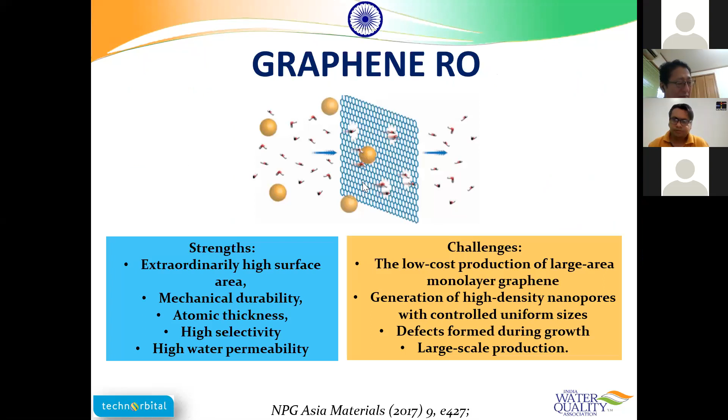So, as the topic is very apparent on the slide, I'm going to talk about the future treatment as far as water purification or drinking water or any water treatment is concerned. So, thank you again, Water Quality India Association, for inviting me. So, let me see how it works.

So the presentation layout is, I'll talk about a little bit of history. Those who have attended my previous talk know I really love to discuss history, because history is like the roots to your present and future development. Then what are the present issues, and then the future on the water treatment front. The future I have split into two sections: we can understand water treatment broadly through desalination and non-desalination.

So begin with the future. Sorry, the history of filtration. I just want to get rid of this top thing. I don't know how to make it disappear, so anyway we can live with it.

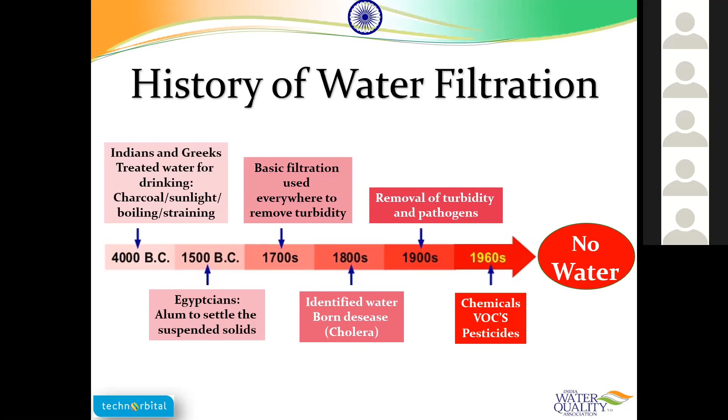We are putting around 80% of the wastewater back into the oceans or rivers without treating it. So that is the price we are paying for our so-called industrial development.

Until now we were talking about treating the fresh water which is available to us, maybe a river, lake, whatever natural source. Now the focus is suddenly how can we recycle the water? And since we have messed up too much with the natural sources of water, now we are focusing on sea water. That water is of course there, like 97% of the earth is sea.

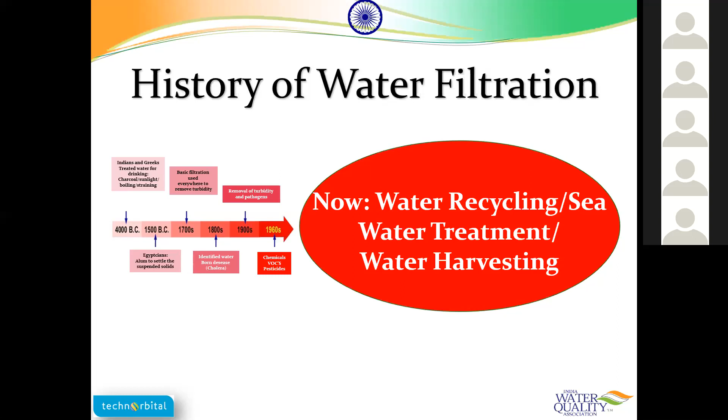So, okay, now coming to the present or future, as I said, I have split this presentation in two parts, desalination and non-desalination. It's not that only desalination can justify the future, but coincidentally, it covers everything. It will cover all your other technologies, whatever is happening now and what will happen in the future, and desalination will end up needing other technologies like nanofiltration, ultrafiltration, microfiltration.

If you want to understand desalination, primarily there are four different ways you can do it. The first is thermal energy, which, to understand it in a simpler way, is mostly distillation or evaporation techniques. Membrane distillation also lies under thermal energy, because though it is a membrane, it needs the feed to be heated to some 75 to 80 degrees.

Mechanical energy covers all the RO membranes, NF membranes, or any other membrane. Electrical energy is electrodialysis or capacitive deionization, and then chemical energy is the ion exchange resin.

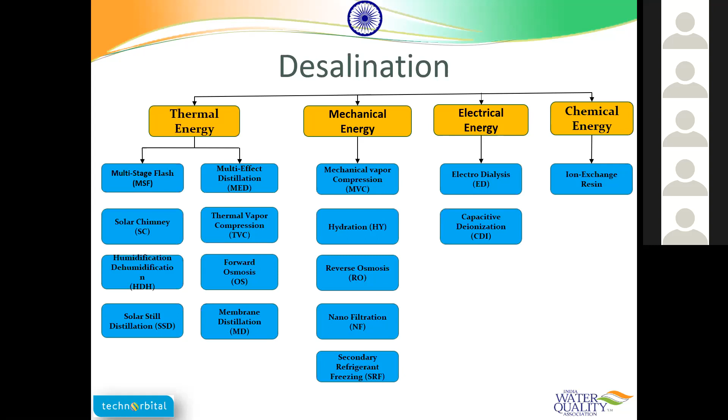So let's try to understand what the future of water treatment is going to be as far as membranes are concerned. Since I'm assuming most of you attended my previous talks, I'm jumping to the topic without explaining what reverse osmosis is. Of course, all the members here know what reverse osmosis is.

At present, there are categorically four types of RO membranes: tap water RO, brackish water, sea water, and ultra high pressure RO. In the brackets you can read the TDS limit in ppm it can treat, which varies from 2000 ppm to 50,000 ppm. The water recovery in these four types of membranes varies from 70 to 50%. That's the max. On average, in terms of practical achievability, it is around 50%.

Okay. Sunil, this recovery is 70 to 80? It is 70 to 50. It's showing this error, no? Yeah, it is 70 to 50. Okay. Does it show 80 there? No, it's not there. Because usually when we write a range, we write from the left side, 50 to 70. So you wrote it backwards. Yeah, it's some error or typo. You just consider 50. Okay. Please go ahead.

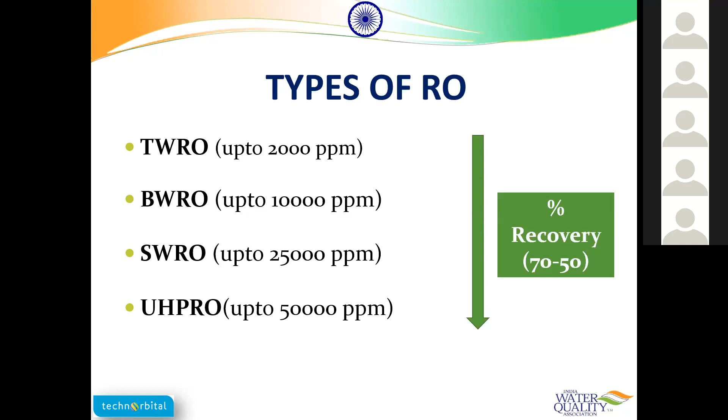So, in order to understand the future of RO, we need to understand the economics of RO. I'm talking about a typical seawater RO plant here. The capex accounts for up to 53%, the opex is around 47%, and of this 47% opex, energy consumption is up to 69%. That's the present situation.

So what are the triggers for the innovations as far as RO or replacement of RO is concerned? Right now the major issues are fouling, whether it is biofouling or colloidal fouling. The energy consumption per meter cube is relatively high. The fluxes are very low; we are talking about 3 to 15 liters per meter square per hour.

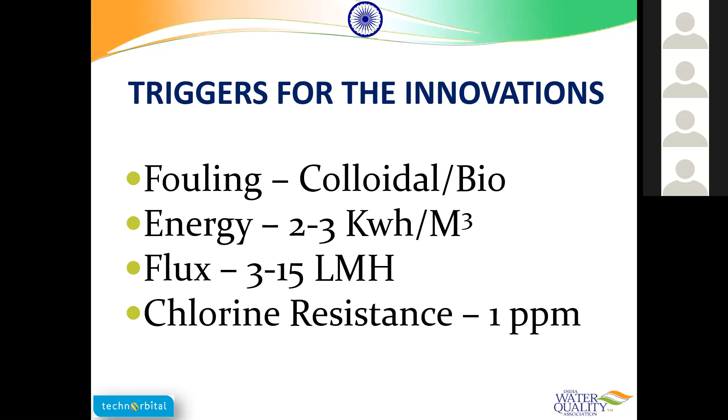Chlorine resistance is very low, up to 1 ppm, and you need chlorine resistance in order to clean your membranes, backwash, forward wash or chemically enhanced backwash. So these are the triggers for the RO membrane to be taken to the next level, or for future developments in RO.

So the first thing I'm going to talk about is RO modified by using nano embedded materials. The idea in today's talk is to just touch upon all the developments or potential technologies which people are working on, or which you can see in the market in the very near future, like maybe 6 months or 1 year, or in the next 3 or 4 years.

So I'll just briefly touch upon the technical aspects of it. If you want to discuss the technicalities in detail, we can have that discussion one on one. So RO-NEM is a membrane, an RO membrane, as you can see in the picture on the right hand side. The top layer is coated with

some... So there is some bandwidth, maybe. Sunil, not able to hear properly. Yeah, now it's okay. Go ahead. Just a minute. Seems like some network issues at mine. Yeah, please go ahead.

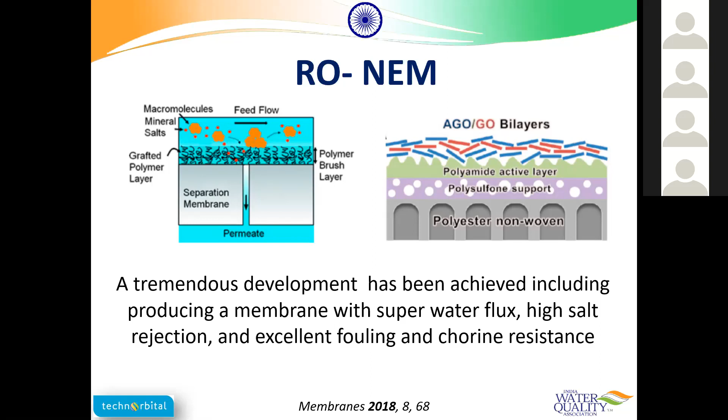We can hear. So RO-NEM is like coating the RO top surface with some nano embedded materials like oxygenated silver or oxygenated graphene. What it does is increase the water flux and salt rejection, improve the fouling behavior of the membrane, and also improve the chlorine resistance. People have been working on it for a long time, and I think it should be in the market in a couple of years.

Now the next level of development happening on RO is forward osmosis. There are a couple of companies already offering this, and in India also there are a couple of groups extensively working on this, including some CSIR labs. In order to understand forward osmosis, you need to understand what osmosis is.

In reverse osmosis, we reverse this by applying pressure on the opposite side. In forward osmosis, we use this concept: how can I modify the right hand side or permeate side of the membrane so that it automatically draws the water from the feed side. So that is forward osmosis. So how does it look? It looks something like this.

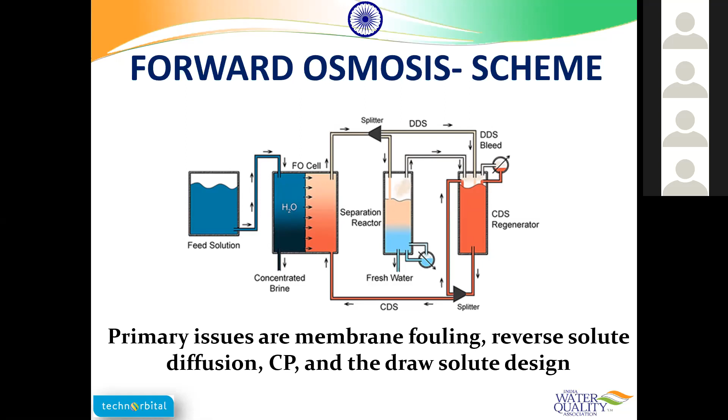There are many issues like membrane fouling, reverse solute diffusion, concentration polarization and all that, but it's a relatively low pressure operation and it holds huge potential. People are aggressively working on it, and a couple of companies are already offering this solution. Now the third thing is osmotically assisted RO.

Osmotically assisted RO is a combination of RO and forward osmosis. The picture here is a little busy or messy, but what we do is arrange different RO membranes or RO skids in such a manner that it works as a normal conventional RO.

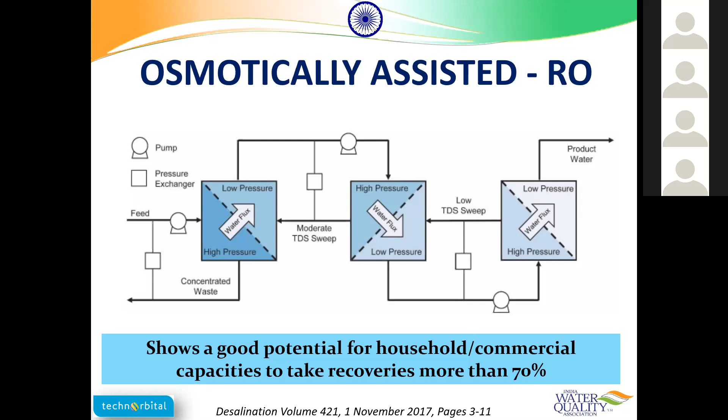Along with that, we purposely maintain some TDS levels in the permeate flow so that we exploit the osmotic pressure also. You don't need to understand this picture, it's very complicated, but it is a combination of RO and forward osmosis. And this holds the potential of taking recoveries up to or even more than 70%.

Now the fourth thing which people are aggressively working on, and there are a couple of companies who are already there in the market offering commercial solutions, and this is also very close to me because I'm personally working on this. So it's membrane distillation. These are membranes which are used for distillation or water purification, removing the salts or minerals from the water. These are not like RO membranes. These are maybe similar to ultrafiltration or microfiltration membranes. So these membranes have pores which are bigger in size. We are talking about maybe 40-50 nanometers, or maybe 0.04 micron in size.

So what you can see, I'm just trying to find a laser pointer. Yeah, okay, I got it.

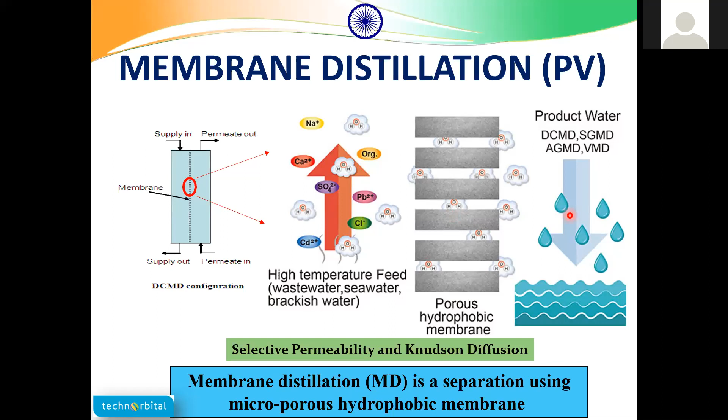And this membrane is a hydrophobic membrane, so it doesn't like water at all. It rejects water, but it only allows the water vapor molecules to pass through these porosities or channels. This is known as Knudsen diffusion. On the other side, we either have a vacuum or fresh air at room temperature or very low temperature. So it collects all those vapor molecules and they go for condensation. So it is a purely thermodynamic application. You can see this in the market maybe 6 months from now.

So what is good about MD membranes is that, in contrast to RO, you're talking about hardly 1 bar pressure in the feed. And the other thing is your recoveries can go up to 90%. As we know the limitation in reverse osmosis membranes, even if you take ultra high pressure RO, which can treat say up to 50,000 ppm TDS, the maximum it can concentrate the feed is up to say 10%. In membrane distillation you can go up to 35 to 40%, up to the point where the precipitation of the salt starts. So you can go up to even that level of salt concentration.

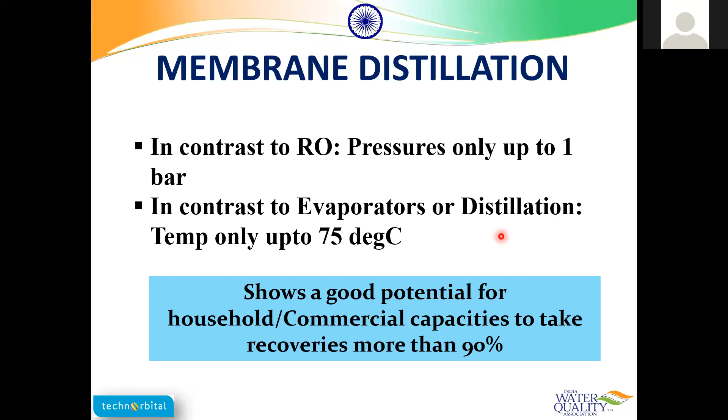So now the fifth thing is graphene RO. There are a couple of international groups who are aggressively working on this. There is one US group who is claiming that they have these membranes already. A graphene membrane is basically a monolayer of carbon atoms, and these hexagonal structures you see are a structural sieve or atomic sieve, which will separate monovalent or divalent ions or other impurities. Of course, the strength of graphene RO is the extraordinary high surface area, mechanical durability, atomic thickness, high selectivity, and all that.

But still there are issues as far as large scale production is concerned. Low cost production is a very big challenge right now. But the way people are pursuing this, it seems like in a couple of years' time we should have this as a commercial solution, and maybe to begin with, it can focus on high value added products where people can afford the high cost.

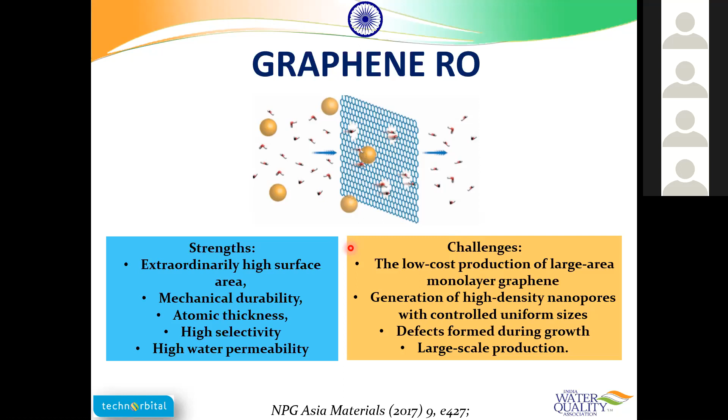So the last part I'm going to discuss on membranes is biomimetic membranes. Now what we need to understand, nature has given solutions to this problem, whether in nature or in our body itself. When I say biomimic, it means can we mimic the biology of nature or the human body, and come up with membranes which represent the operations the body is taking care of, maybe blood purification, or whatever we eat and drink.

But our kidney is under use for, even if we take an average life of 70 years, it is still under use without any chemical wash, CIP, backwashing and all. So similarly, the cell membranes are filtering the liquids, and they only allow the necessary amount or necessary quality of water to pass into the cell, and they reject all the unwanted impurities.

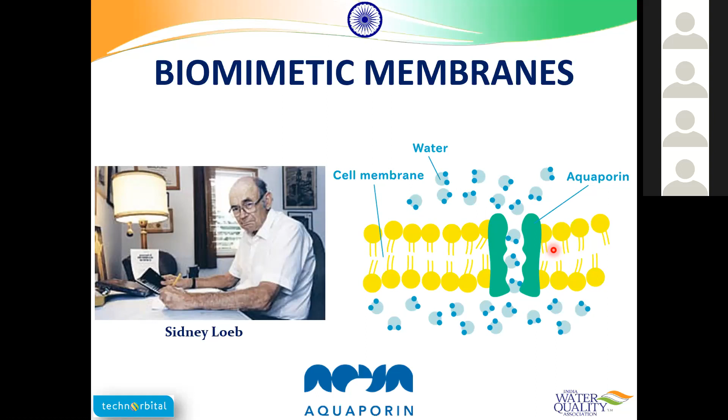And of course there are people working on making desalination more feasible. So a combination of all these membrane based technologies I mentioned, you can mix all that and try to come up with a very feasible solution. People have started already using energy recovery devices. So ERD is already in the market since many years. So yeah, that was based on the

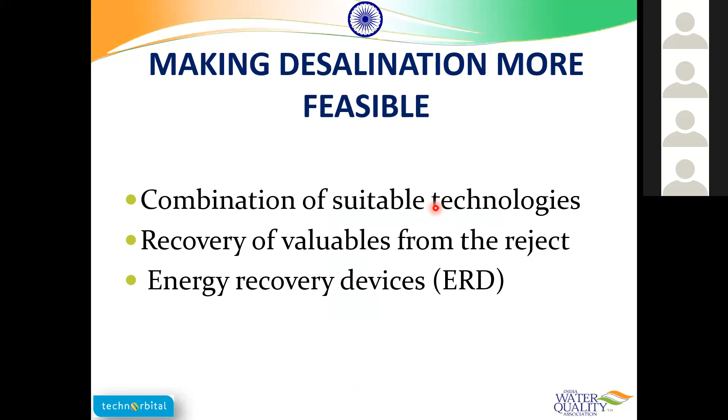Sunil, we lost you. Yeah. Can you hear me? Yes, now. Okay, you can hear me now, right? Yes. Let me take a sip of water. So now, you can hear me, Chandu, right? Yes, yes, we can.

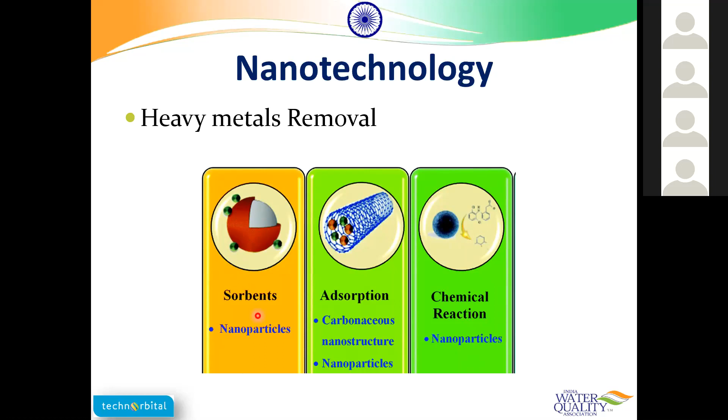So we are entering into the next part of the talk, which is non-membrane, non-desalination. Now there are a lot of people working on nanotechnology based solutions, and that is mostly limited to heavy metal removal. These are either nanoparticles or nanowires, as shown here, whether alumina based, TiO2 based, or silver based. I'm just going to show you one application here by the Indian Institute of Technology, Chennai. Professor Pradeep has come up with this innovative technology based on alumina and silver.

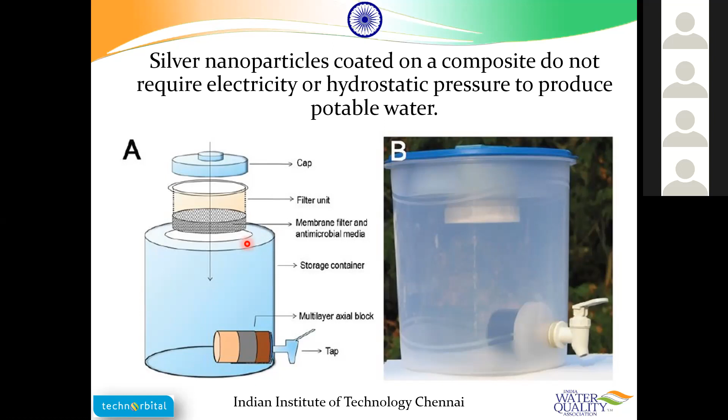It works without electricity, and they claim to remove all the arsenic from the water. So such solutions are available. There are multiple solutions like this; I'm just mentioning one here. There are a lot of people working on advanced oxidation technology. As far as oxidation and disinfection of the water is concerned, we know that chlorine has been in use for many years now, maybe more than 100 years or so.

But the problem with chlorine is that it forms trihalomethanes, which are toxic for the environment and for humans. So many people are working on highly reactive radicals which can form in situ hydroxyl radicals and oxidize the impurities in the water and disinfect it. In the non-desalination part, we are not talking about salt rejection or removal of minerals or TDS. It is mostly related to how we can disinfect the water, take care of the chemicals in the water, or biologically non-degradable impurities in the water.

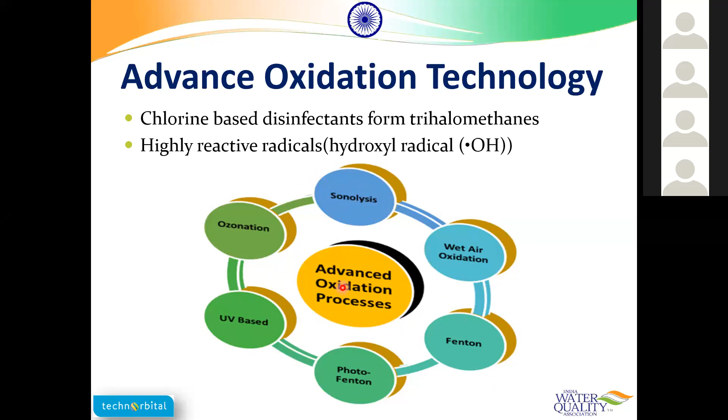In advanced oxidation processes, there are multiple things people are using, like ultrasonic sound, the Fenton reaction, UV based ozonation and all that. But today I would like to mention one very recent technology which Mr. Tate from Liquid Technology International Japan was talking about. He is our international guest today. They have found a natural ceramic source in Japan, located at a very specific geological location, and they have formed ceramic beads using this material.

So it is doing oxidation of the impurities in contaminated water, and it is a natural, I would say, oxidation process. And there is something called the Peltier effect, which they are exploiting or generating by using these ceramic beads. So I would like to show you a 1 minute video on this.

Yeah, yeah. Can you see, Chandu? No, we just see your presentation only, not the video. Now? No, just a minute. You're putting another file or you're clicking the YouTube? No, I'm just trying to open a YouTube. Dr. Sunil, in this share screen option, you have to choose the screen. Yeah. So that's what I'm trying to do now. So where is that? Yes. Yeah. So

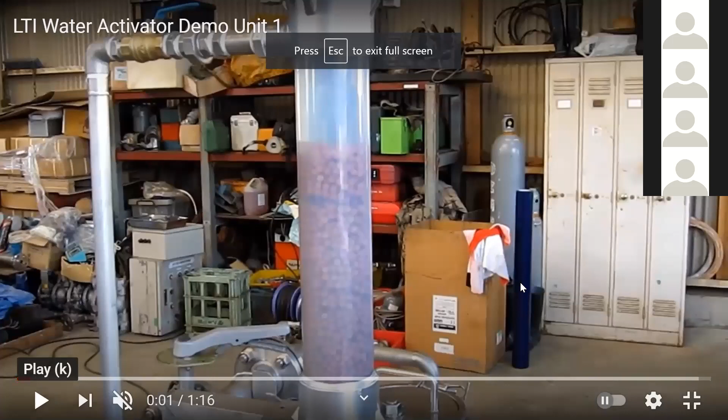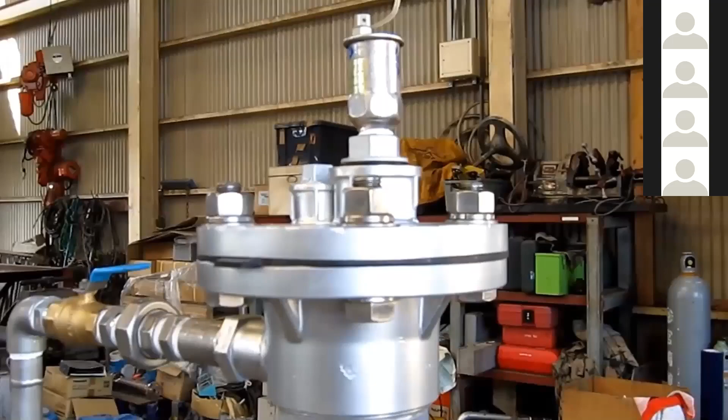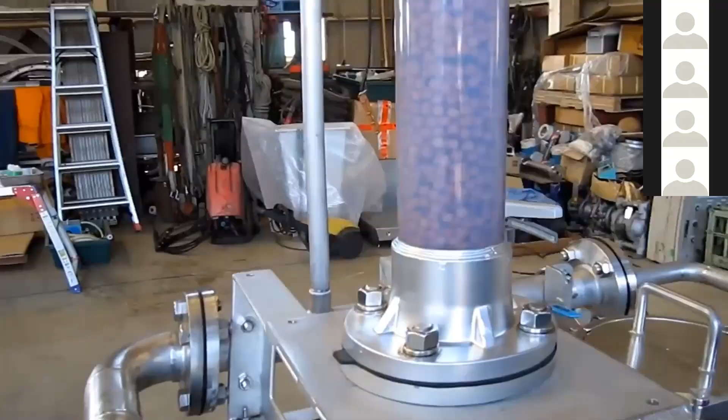That is how this looks like. There are beads. There has been some agitation in the column like that. So it naturally starts. It generates charge on these beads, and that is how it oxidizes the impurities and reduces the scaling components, say calcium, magnesium, all these scaling minerals it reduces.

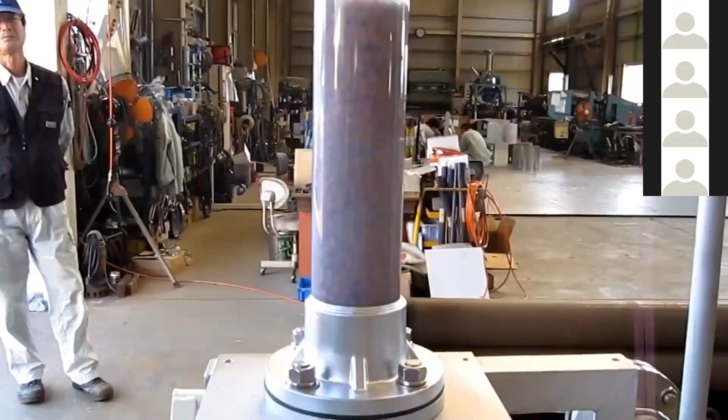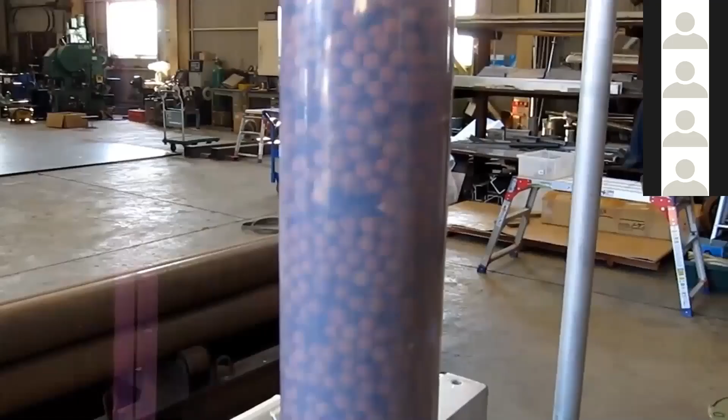And if you talk about the recent trials they have done in India, they have done some trials in West Bengal. The feed water was having around 600 ppm of TDS, and after this treatment you get around 150 up to 200 TDS. So good thing about this is that, just go back, it is kind of a potential replacement for the ion exchange resins.

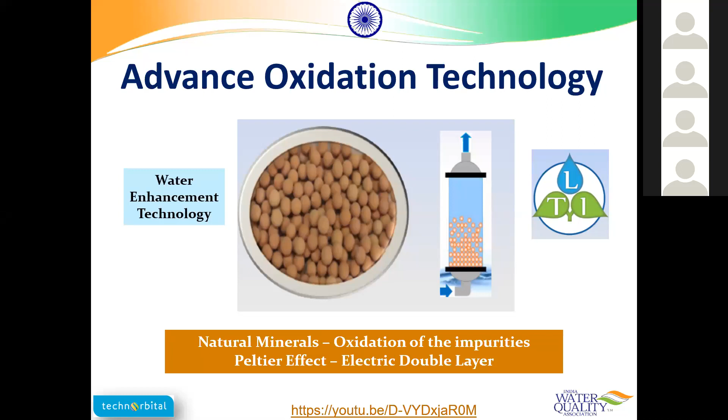And the good thing is that it doesn't need any recharging. It can be operated in a continuous mode without any recharging or treatment in between. The minimum life they are claiming is up to 5 years, and it is already in use in the US for different agricultural applications. So this is something I wanted to share today prominently. That's why I also invited Ted, who is representing LTI, so that he can come to know what all possibilities are there in India.

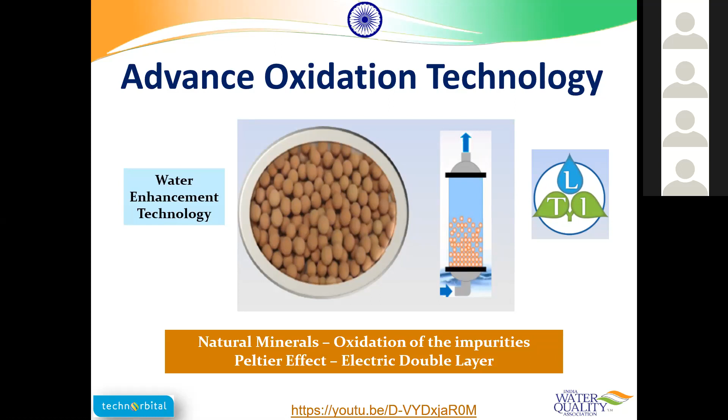Then there are technologies like pulse UV technology, which compared to the continuous UV releases a certain amount of UV light with a particular wavelength, but in pulse formation, and it is supposed to be more efficient. It can have good microbicidal effects compared to the continuous UV, but there are multiple claimants saying that continuous UV is still the best one. But I personally see a lot of potential in this.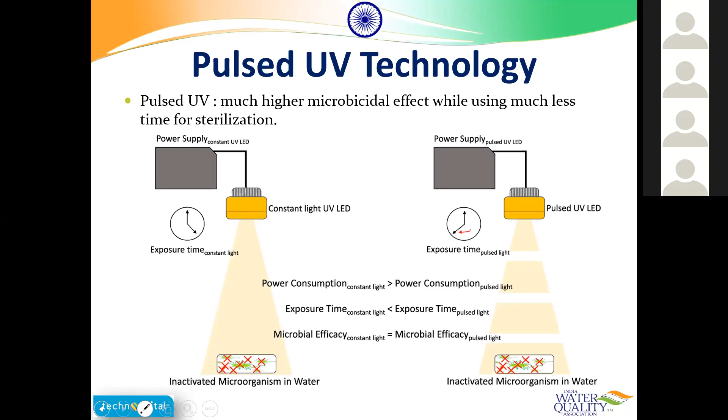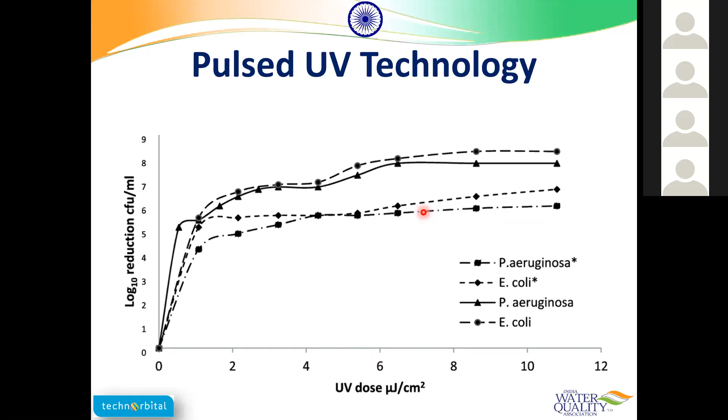Yeah, just go to the laser pointer. Now this is some reliable data I got on the pulse UV technology. You can see at around 6 to 8 microjoules per centimeter square dose, you can get up to 6 to 7 log reduction of the bacteria. So this is something which is really picking up. These are some details. I will skip this.

Now, while I was preparing for this talk, I came across this statement by Sebastien Tilmans from the Codiga Resource Recovery Center, which is in collaboration with Stanford University, on water treatment using anaerobic bacteria. What it says is the concept of waste doesn't exist in nature. Every byproduct of some natural process is an input for another. As I was saying earlier, nature has solutions for everything. We just need to pick up the clues and convert them into a usable form.

So this brings me to the last segment of the non-desalination, non-membrane treatment, which is bacteria. Right now we are scared of all the bacteria and viruses because of COVID, but I'm going to talk about a very helpful bacteria here. Personally I am a fan of this anaerobic technology, and it seems like it is going to solve many issues in the future.

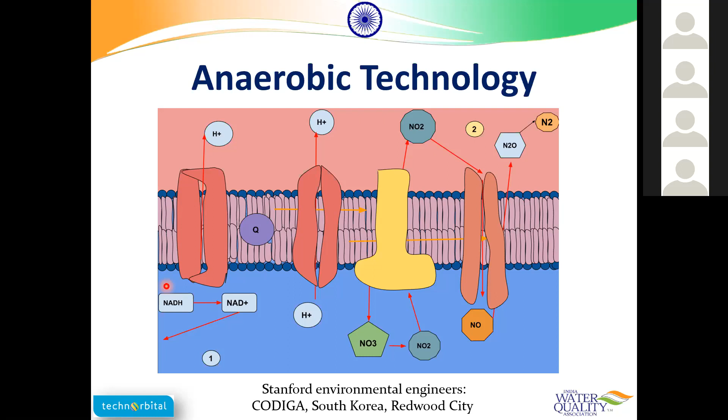So there are only 3 plants right now in the world. One is the Codiga facility in US, then South Korea has one plant, and now recently they are coming up with a big plant in Redwood City. So this is how it looks. As I said, not only the water, but it can treat any other waste, whether it is agro waste or wastewater or food waste.

So this bacteria eats all the impurities in it, and then you get biogas also, and of course one of the products you get is that water which you can filter through the membranes. It is still not of the quality of drinking water, but it can go to the lagoons, wherein you can try to at least maintain the water tables or replenish the aquifers.

Of course, we all know the aerobic technology; we are right now using a lot of bacteria based technologies which need oxygen. When it needs oxygen, you need a lot of energy, because you need a lot of blowers to mix air into the water and to keep that bacteria alive. But this anaerobic bacteria doesn't need oxygen, so you need very less energy because you don't need blowers or air, and the footprint is around 40% less.

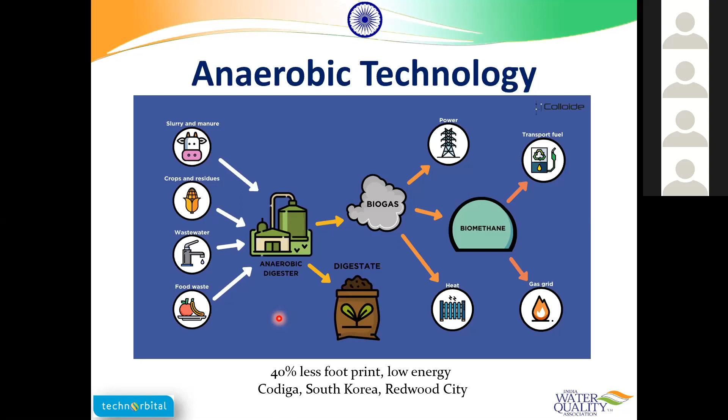So I see a huge potential in this as far as the future is concerned, but this is mostly for the community projects or treating very large amounts of water. Now there is a group working on something called high tech filtration.

Now here all the BJP supporters should get very happy, including me, because this is mostly talking about a treatment of manure coming from the cows.

And the cows are there worldwide, which makes this technology very promising. So what they do is they treat the manure or the cow dung, which gives you biogas, and then as one of the byproducts it gives you water, and that you can filter through different membranes, air stripper and all that, so you can get clean water.

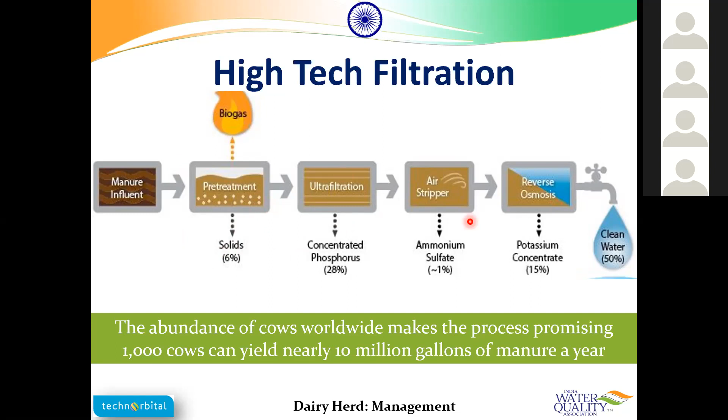So to put some numbers on it, for example, if there is a dairy farm having 2000 cows, you may ultimately end up getting around 40,000 gallons per day of water, which again is not drinking water, but it can go to a clear water lagoon and you can try to replenish the aquifers.

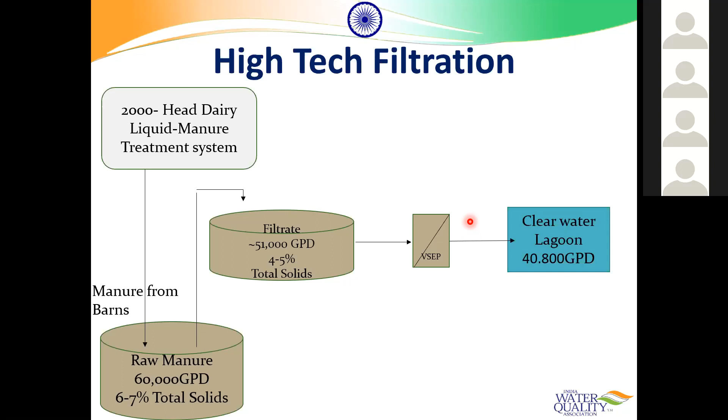So similarly, the third important hint or clue nature is giving us is the nitrogen cycle, wherein the bacteria convert nitrogen into ammonia. Then ammonia converts into nitrates. Nitrates are consumed by the plants, and then again it is released into the atmosphere as nitrogen. So you can use these types of bacteria and exploit this cycle also in order to treat the water.

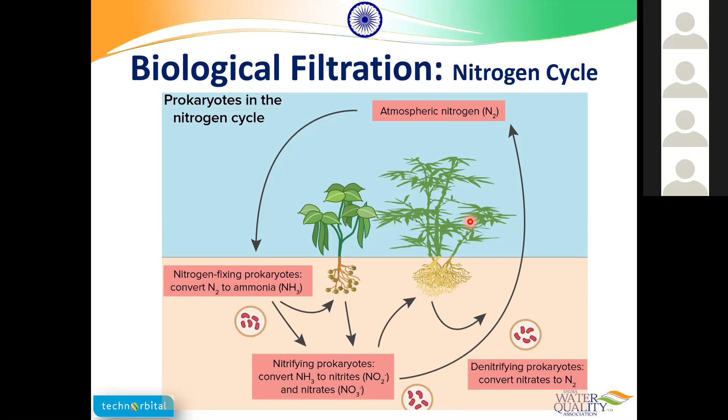So okay, I'll come to the very last part of it. It's around, I think, 5 minutes left for my talk.

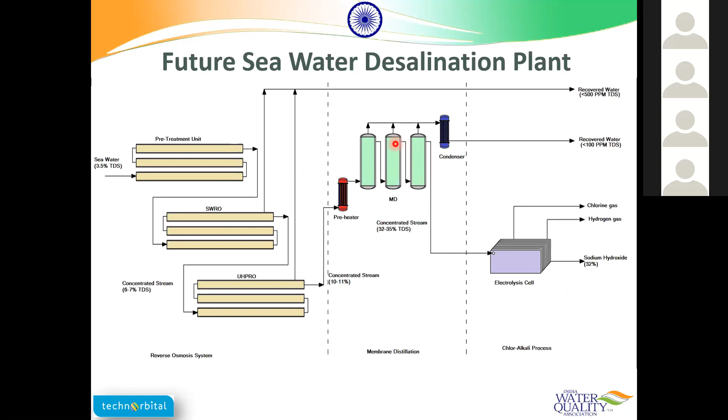Thank you, Sunil, for showing us the future of water treatment with different kinds of innovations going on, and the timeline also you have put, something coming in 6 months, 3 years, 4 years, so that's the one point.

And I would like to say one more thing. I think what he said was a little bit of a political word that he used. So I feel that Sunil, you should have used the word livestock rather than mentioning that. Let us take it as we have a good forum here. Let's take this sportingly, and nothing is about political affiliation. We don't talk about that in these forums. So just take it lightly. I don't want any further discussion on that. Let's focus on what is there in the content, which is more important than some sideways remark to make it more interesting. So that is something I just wanted to clarify right away.